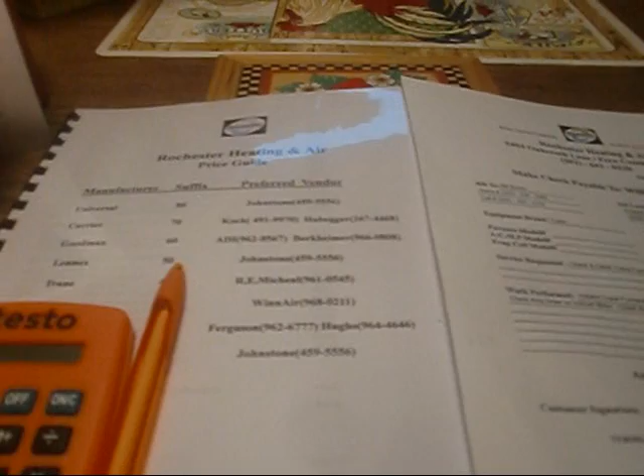Hey guys, I appreciate you coming on that little ride with me out to Prospect. I wish I could have showed you more, but most of the time I was there, I was talking to the customer. What I actually rode out to Prospect for, which is a pretty good ride for me, it just so happened to be a friend of a friend, and she wanted me to go check on him.

So I basically checked out the furnace and everything, and it turned out it was a Trane electric furnace, 1985. So that girl's over 20 something years old. It is time to update. It was a model number BOV736A10CDZ. And out back, he had a Payne. It's a 010.

Well, I take that back. It's a PH13NR036-C. I believe it's maybe 7 or 8 years old. But I was trying to explain to him that even though it's not that ancient, I don't like putting on mismatched equipment. So I'm going to give him a bid for an American Standard heat pump, American Standard air handler, and strip heat.

So while I was there, I broke out my Leica and started measuring room by room. But the first thing I did when I got there is I've got an app on my phone here, and it's got a compass on it. So I determined what was west, east, south, and north. And this is actually a key factor in doing load calcs.

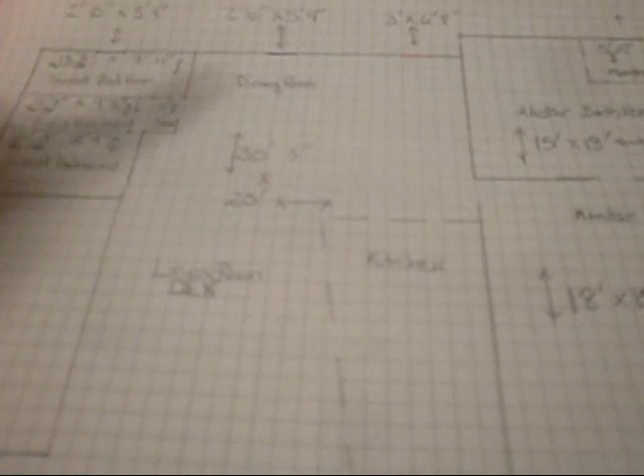So once I did that, I made myself this. You ought to see the other drawing. It's terrible, but this is just something I tried to draw to scale. Out in the field, I was just scribbling down numbers and everything. But the dining room here, living, den, kitchen, this is all an open floor plan. I guess you'd call it a great room. And it's got the 13 foot 3 inch, I believe, ceiling in it.

And the only thing separating the kitchen from the dining room or the living room here is a small partition of cabinets here. And this is a bar here where everybody can sit down and eat. And here's the table where they eat at, and yada, yada, yada. But anyway, so I got all that measured up, and I marked my doors red, and I measured my doors, and I marked my windows blue.

And so I went in and went from room to room. So I did my great room. I came over here on this side of the house. This is the entire master side of the house. This is the master bedroom and the master bathroom and the master closet. So I measured all that up. And then I come over here, and right over here we have the guest bedroom 1, the guest bathroom, and we have the guest bedroom 2.

And right here, actually this is where I came in at. This is the garage here, and right here is where we go down into the basement. So we've got all this measured up. I've got all my measurements written down, my windows, my doors, and whatnot. And here's my basement drawing, my mechanical room, and I went ahead and measured all that up. So what I'm going to do is actually get onto my load calc program.

And everybody should be doing this, guys. The day and age we're in, it's not that expensive to get a load calc program. I know several of my buddies on here, they're pretty smart fellas, and they can do it longhand. I could probably do it with practice, but heck, you know, I spent $400. I got myself a load program.

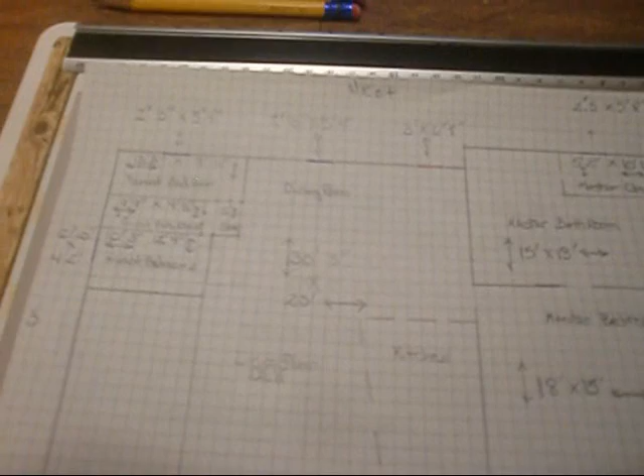But alright guys, I might show y'all a little bit of that. It's probably going to be kind of boring, and I think I'm already up to like 16 minutes again, and I'm sure y'all love my epic videos.

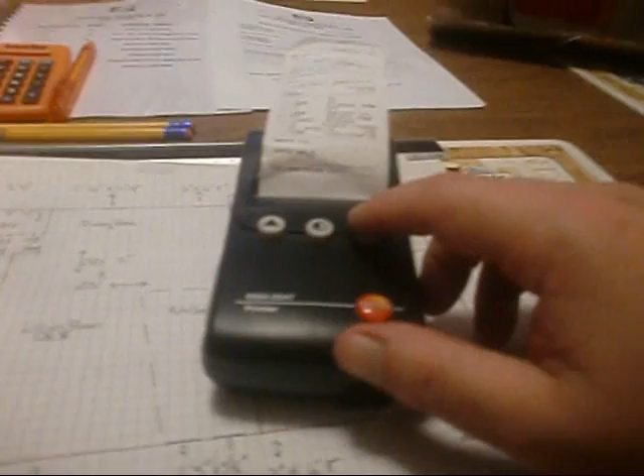So I reckon I might show a little bit, maybe show what our total loss is going to be and our total heat gain or whatnot.

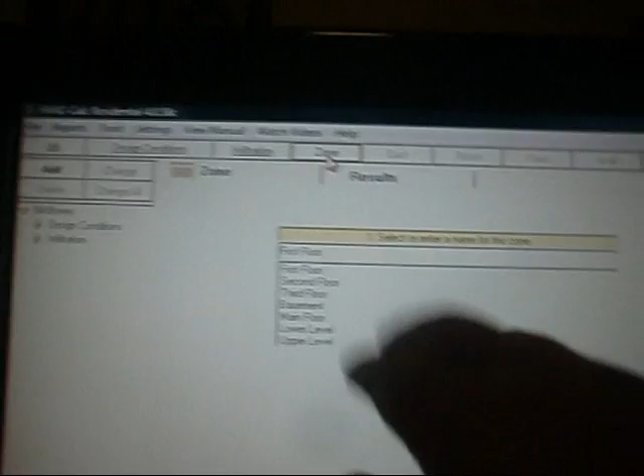That's going to be like 72, whatever our design is for my state, and that's what it is. And then we did our infiltration, and now we're on our zone, which is going to be our first floor, is where we're going to start at, guys.

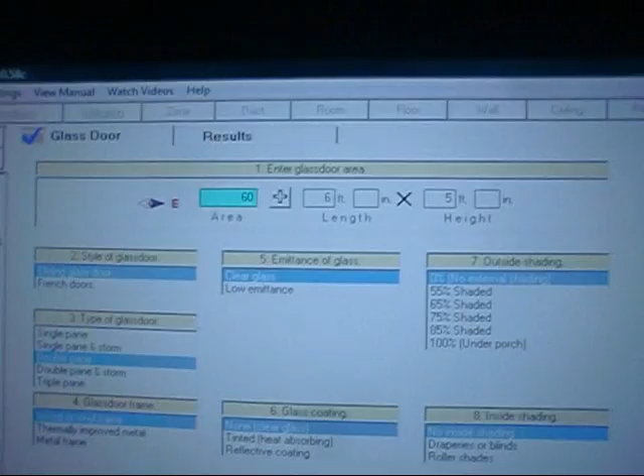Alright guys, we're moving right along, and we started with the design conditions, and we got the infiltration, and we took our first floor, and we got our great room that I showed y'all earlier. We had our people, our miscellaneous, our fireplace, our floor plan, our wall plan, our windows, our doors, our east wall, our windows, and our glass doors, and our ceiling. Then we went over to the master bedroom. We've got our people, miscellaneous, floor, north wall, east wall, windows, doors, ceiling. And then we did our master bathroom, floor plan, west wall, windows, north wall, and ceiling.

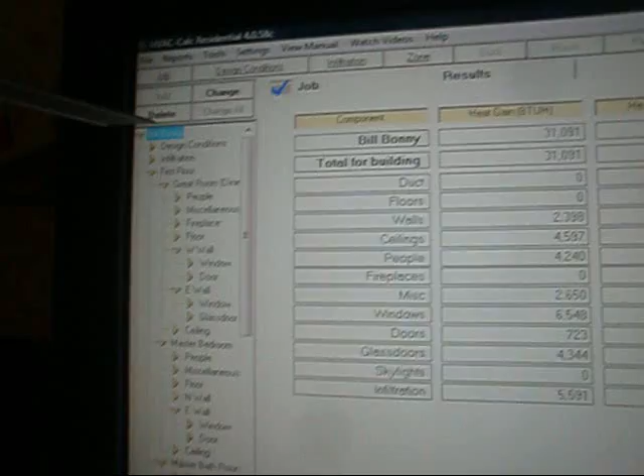So like I said, it's probably kind of boring, but this is what you have to do to actually do it correctly. Okay guys, I hope I didn't bore you to death doing this load calc, but basically what we did, we started off with design conditions, we got infiltration, and we started with our first floor. First floor, we had our great room. We added people to it. We added miscellaneous, such as computers, TV sets, yada yada yada.

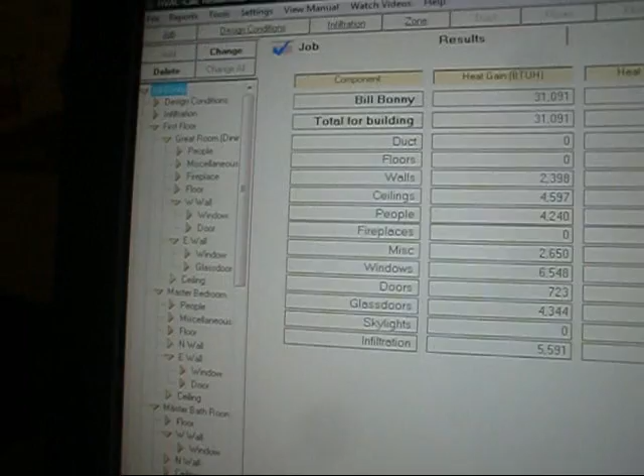And we added our fireplace, we added our floor plan, then we added our west wall, we added the windows, and we added our doors. Then we added our east wall, our windows, and our glass doors that we had on our east wall. Then we went to our master bedroom, yada yada yada, followed the same thing. Now, out of all our calculations that we got, we're looking at 31,091 on our heat gain, and we're looking at 47,726 on our heat loss.

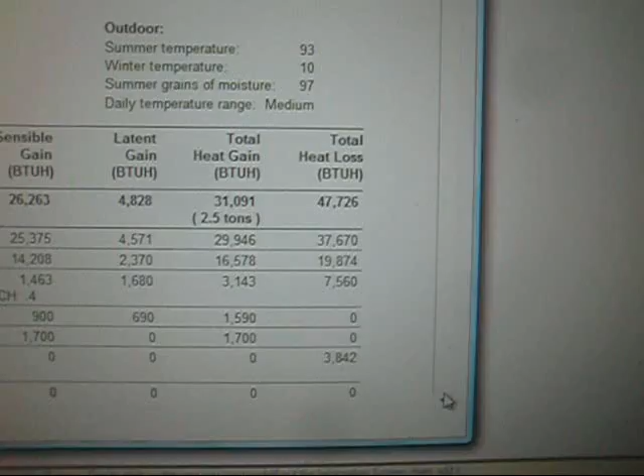And you can actually go room by room. Let's say we hit this great room right here, and it still tells us what we need to have, but it tells us our heat gain, our heat loss per room. But we can actually come right up here to our reports. And this is what I love to do right here. I'll go by each component. And this right here tells me exactly what we need to install. Now we have a total heat gain of 31,091, like I just showed you, and that's stating that we need a 2.5 ton unit. There is not a safety factor there.

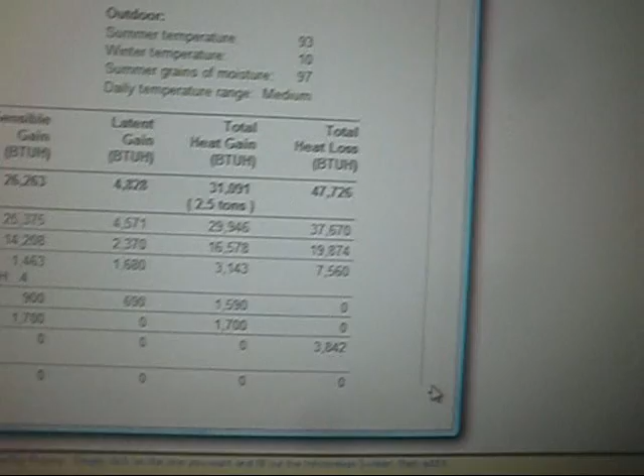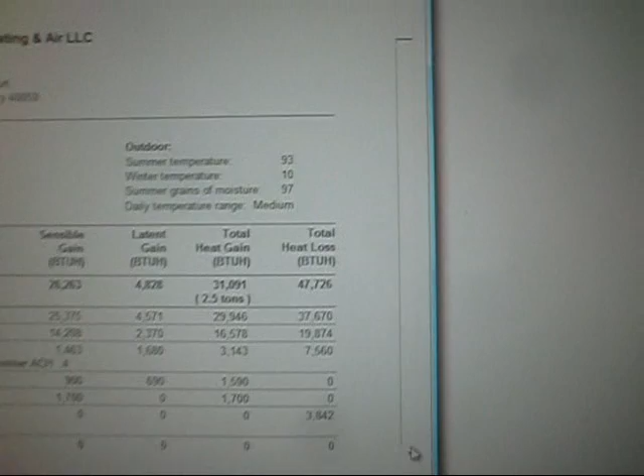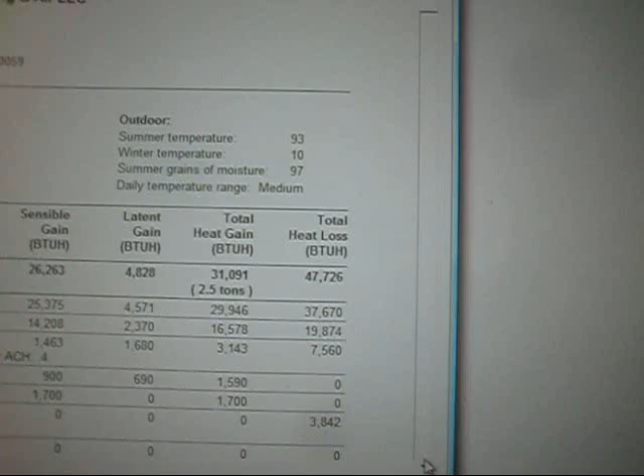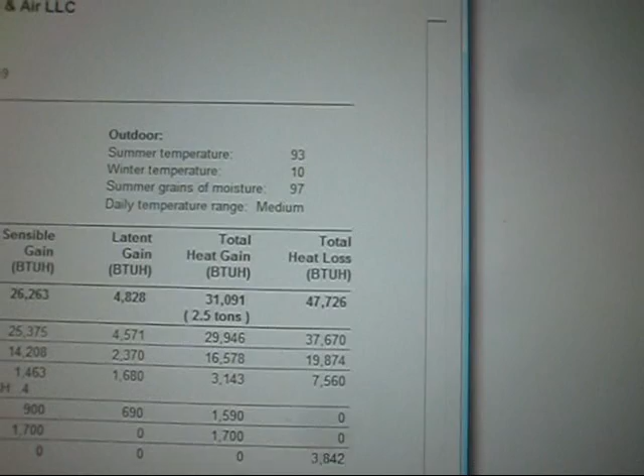However, we have a thing here called total heat loss, which is 47,726. There is a safety factor on that, ain't it, Ray? Right, I think it's 25% they want us to add to the total heat loss for the heating side. Could you do that for me? Sure, 47,726. That's 11,931. All right, add that to that 47,726. That's 59,657. All right, so we're looking at a 60,000 BTU furnace here, added with a safety factor.

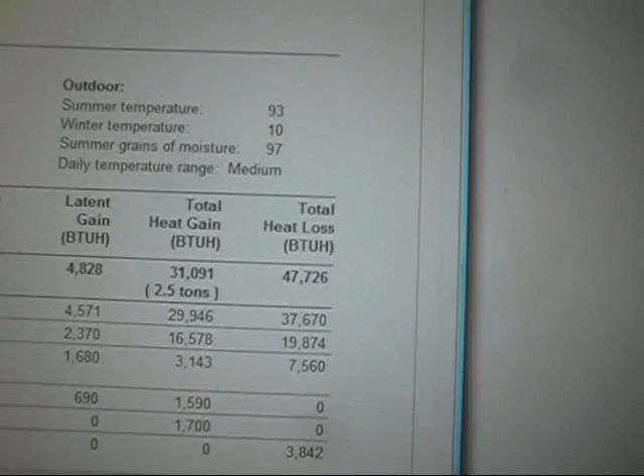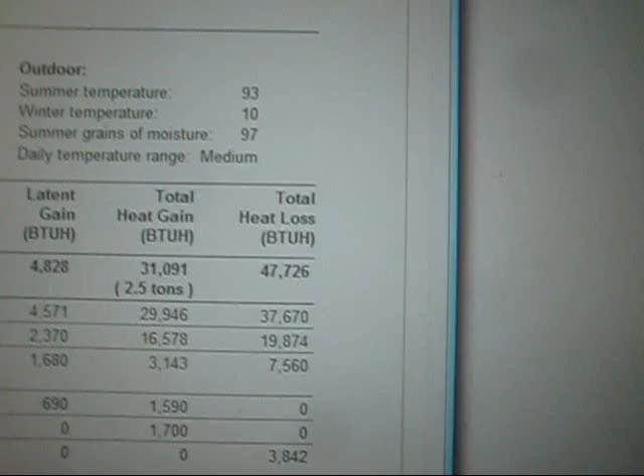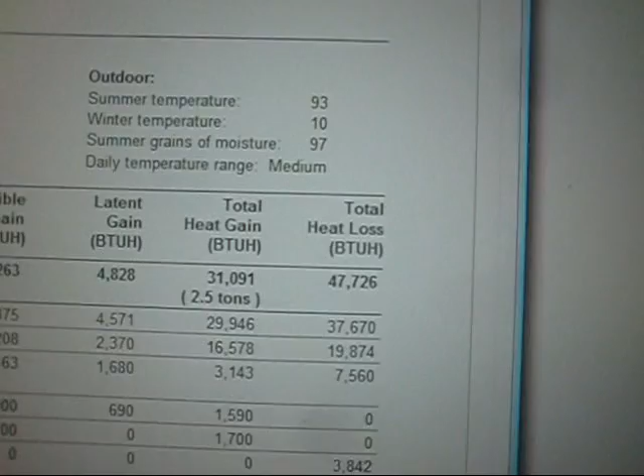Now, we're not going to put in a furnace, we're going to put in an air handler. And I guess I'm going to give some secrets away here, heck with it. Ray, there's 3,400 BTUs for 1 kW, brother. Can you divide that for me and tell me how much strip heat I need here? Sure. That would be 14.04 kW. Okay, well, I would actually put 15 kW in instead of going on the high side of it.

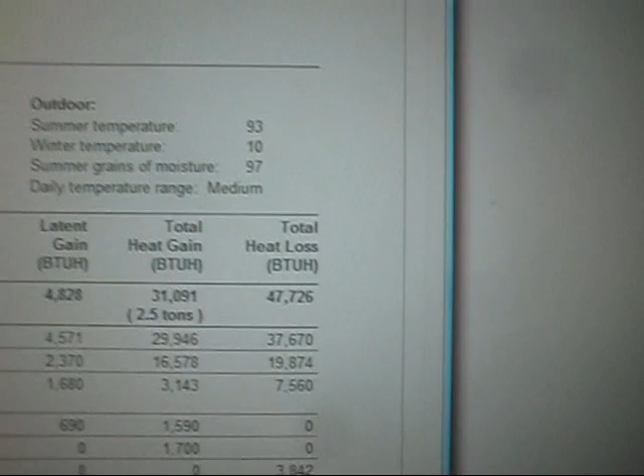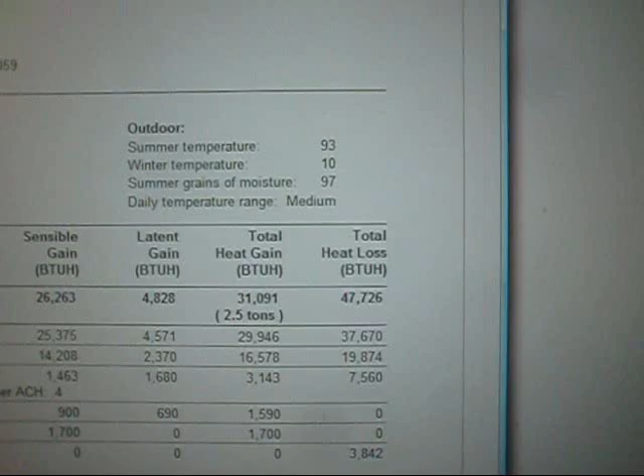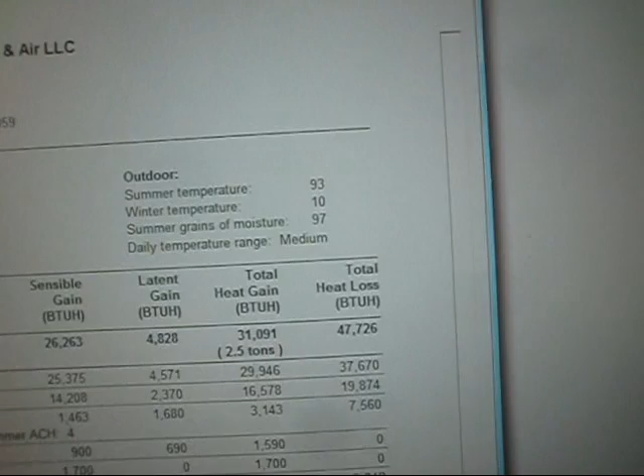Now, Ray, could you actually explain to us what is 5 kW, 10 kW, 15 kW? What do you got there? 5 kW is 17,000 BTUs. 7.5 kW is 25,000 BTUs. And 10 kW is 34,000 BTUs. 15 kW is 51,000. There we go. 20 is 68,000. So it goes up to 25 and 30. So we have 2 more to go through, and I think 30 is what, like 102,000? 30 is 102, yes. Yes, okay.

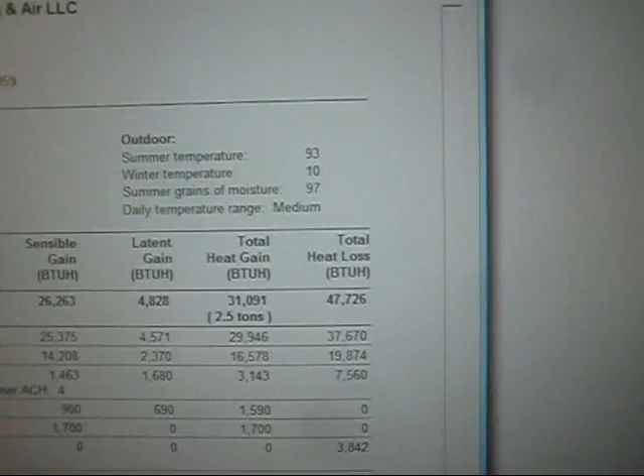All right, guys, this is probably kind of boring to y'all, but me and Ray actually have fun. Well, I do, and I know Ray does. You have fun doing this, Ray? Oh, yeah, I do. I really enjoy it. I do too, man. Man, I appreciate you helping me, Ray.